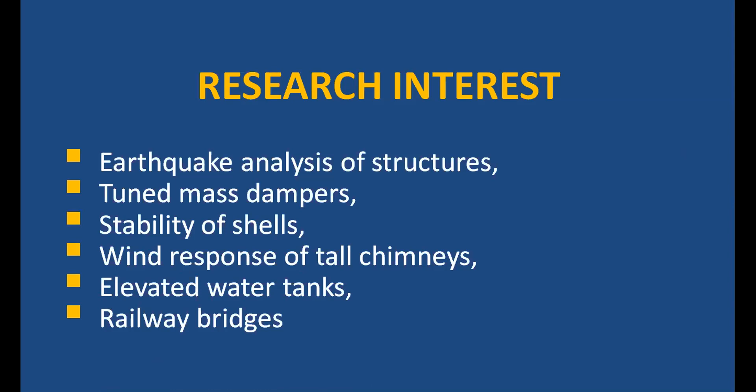He is having research interest in earthquake analysis of structures, tuned mass dampers, stability of shells, wind response of tall chimneys, and elevated water tanks. He is also interested in railway bridges. He completed many research projects, on tuned mass damper buildings from 2000 to 2003 for MHRD, with funding of 6 lakh rupees, and on seismic response control of elevated water tanks from 2002 to 2005 under MHRD, with funding of rupees 10 lakh.

He worked on the guidelines for the seismic analysis of liquid storage tanks at IIT Kanpur. He also worked on the wind response control of tall RC chimneys from 2006 to 2009 under the UGC, with funding of 10 lakh rupees. He also worked on the development of explanatory examples for IS 1893 and IS 13920 at IIT Gandhinagar.

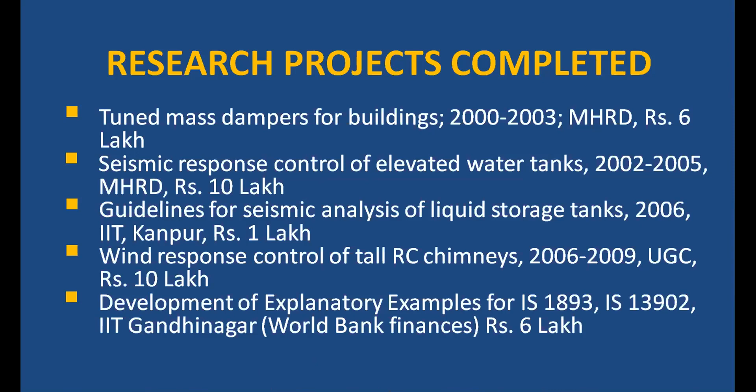Many consultancy projects were under his guidance. Some of these: he worked on the design of a telephone exchange building at Bangalore, and on vibration testing for a wall for a nuclear unit. He also worked with industries at Nagpur, and in the area of structural design checking of water tanks for the Government of Maharashtra.

In the area of publication, he published 19 papers in international journals, 8 papers in national journals, and more than 50 papers in conferences. He supervised 6 PhD candidates, and 2 candidates are ongoing. In MTech projects, 60 students completed their dissertation under the guidance of Dr. Jaiswal. Out of those, 3 MTech projects received best dissertation in the year 2008.

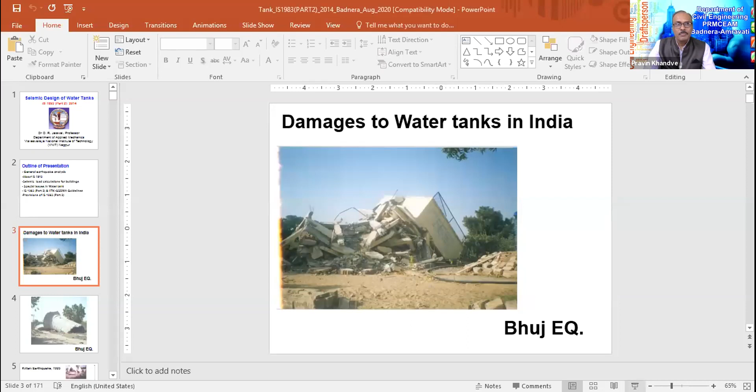Please wait a while at the speaker end because of a connectivity problem. The speaker got disconnected and is now connected again, so the session will continue. Yes, sir, you were disconnected because of an internet failure. You are connected again now, please start. Okay, how much time was I disconnected? Just for a minute. Okay, so I was showing these slides. Again, you have to share the slide. Sir, please share the slide again. Yes, now it is visible.

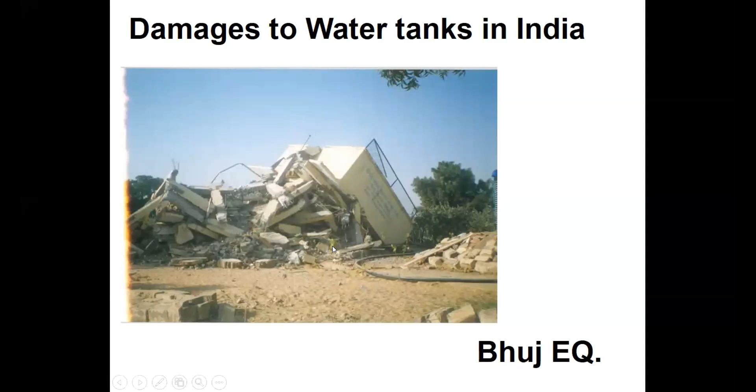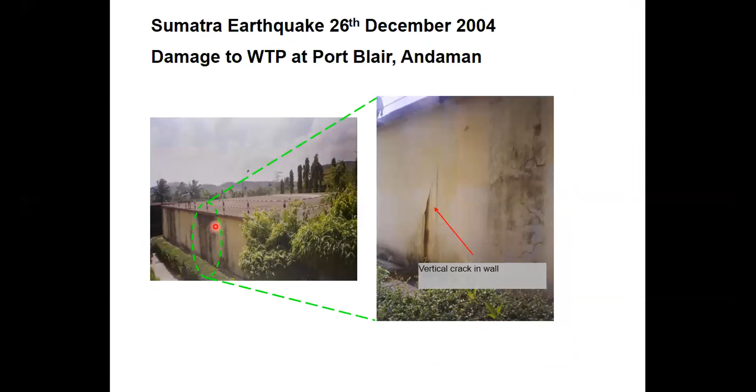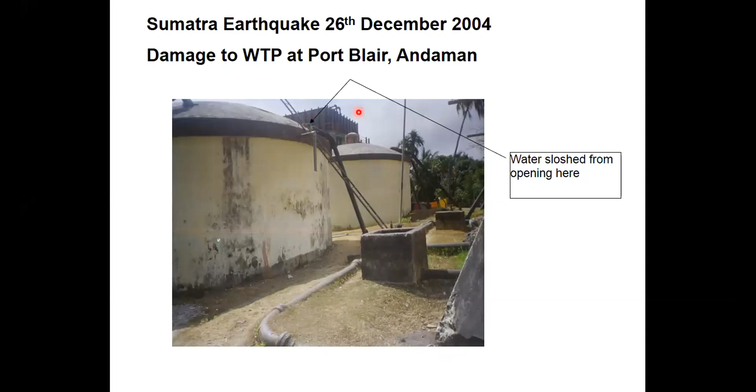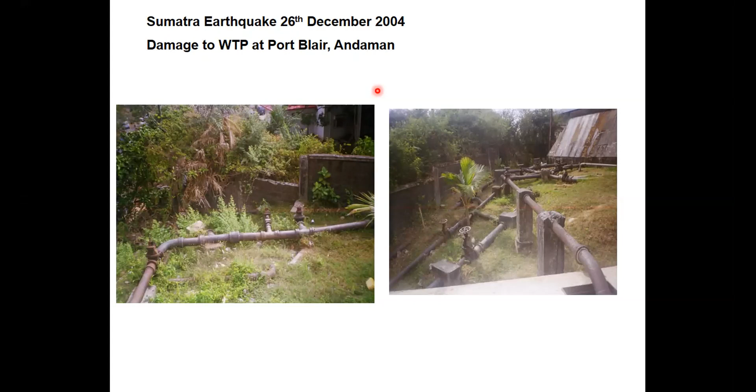So what shall we do? What should a structural engineer do so that tanks perform satisfactorily during an earthquake? Those types of issues are discussed in IS 1893 Part 2. As I said earlier, Part 1 deals with general provisions and buildings, and Part 2 deals with water tanks. Now, as we must have seen yesterday, earthquakes occur because of a rupture somewhere below our feet.

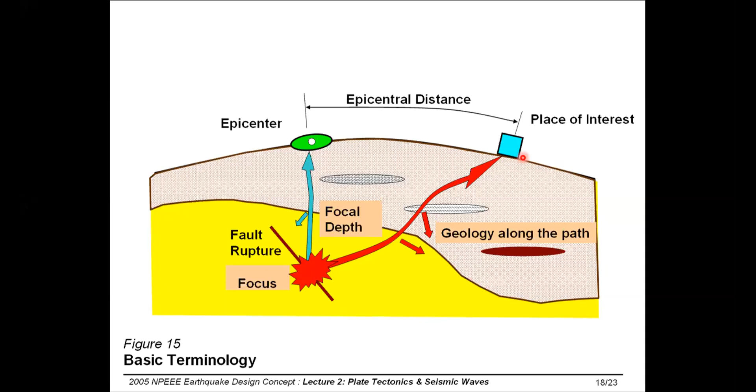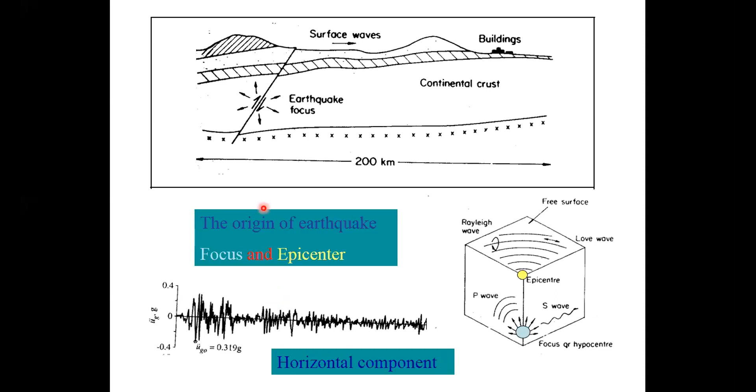Now, at a particular place, if you record the ground motion, you will see a time history like this. On the x-axis is time, on the y-axis ground acceleration, and there will be a random kind of plot. That means ground acceleration varies abruptly, randomly or stochastically during the earthquake. Typically an earthquake lasts 30 to 60 seconds, sometimes longer. Particularly, severe shaking is of the order of 30 to 50 seconds. So during this, the ground shakes randomly.

For engineering purposes, we resolve it into three components: two horizontal components of ground shaking and one vertical component. The horizontal component is more critical. The vertical component is of more concern for structures which have long spans, long span beams, long span bridges, pre-stressed structures and things like that. For ordinary, normal structures, it is the horizontal ground shaking which is more important.

So typically, this problem of calculating the earthquake load is nothing but a problem of Newton's second law of motion. It says that any structure which has mass, if subjected to acceleration, the total inertia force acting on it will be mass into acceleration. Now, during an earthquake, since the ground shakes horizontally, there is a horizontal acceleration in the structure. On any structure, be it a building, water tank, bridge or chimney, a horizontal force will act, and we have to calculate that horizontal force.

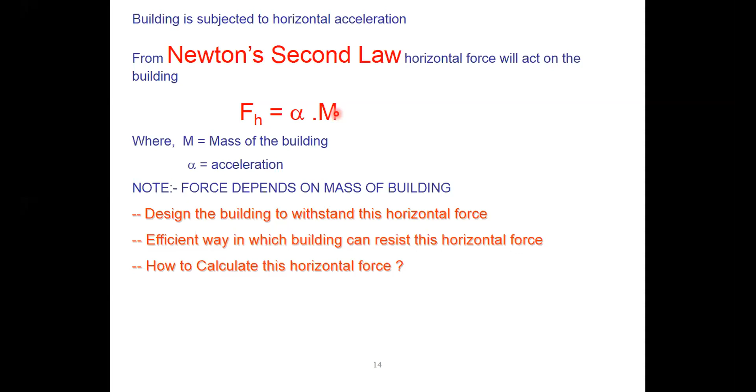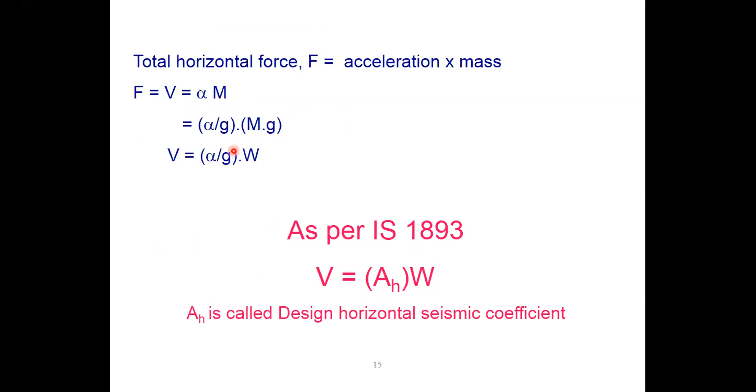That horizontal force calculation given in the code is this formula: total horizontal force is Ah into W. W is the seismic weight and Ah is the coefficient. This is the same as alpha into m, mass into acceleration. Mass multiplied by g becomes weight, and alpha divided by g is a non-dimensional parameter, which is Ah in our code.

Now this Ah in our code has three different components: Ah is Z by 2 into I by R into Sa by g. Z is the zone factor, which comes from the zone map. I is the importance factor, R is the response reduction factor, and Sa by g depends on structural characteristics. Different structures will shake differently during the same ground motion, depending on height, width, length and other parameters. Yesterday you must have been introduced to this formula.

For water tanks the same thing continues. The only thing is that you have to calculate Sa by g properly and use R properly. For buildings, R is typically 3 or 5 depending on whether the building has a special moment resisting frame or not. I for water tanks will typically be 1.5 because they are important structures, and Sa by g we will calculate from the time period.

IS 1893 has a history like this. It was first published in 1962, then revised in 66, 70, 75, 84, 2002, and now 2016. In 2002, IS 1893 was split into 5 parts. Part 1 you are done with, part 2 we are discussing now. Maybe this afternoon Dr. Ingre will take you through part 3. So like this, there are different parts.

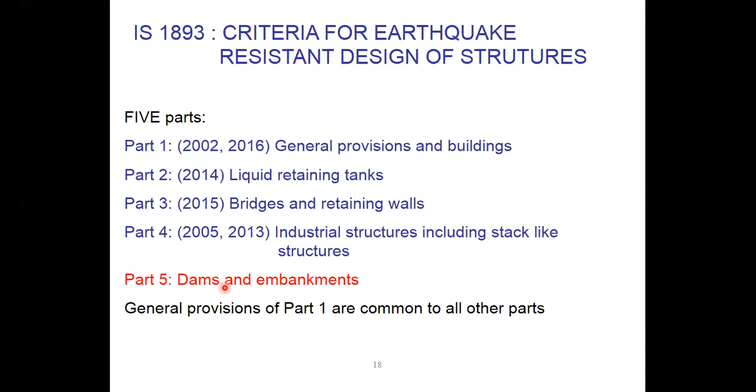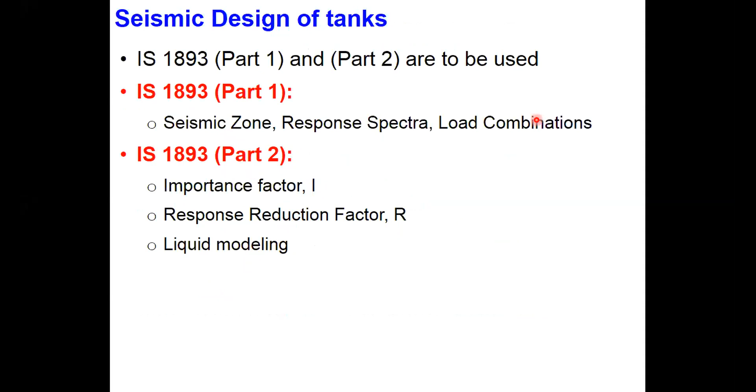Now, for buildings, you calculate Q1, Q2 by parabolic distribution of W h i square, total force. And then for buildings, there are two methods, ESA and RSA. In response spectrum analysis, you have to first perform the free vibration analysis, then calculate the coefficient, which is denoted as Ak for each mode. Then for each mode, at each floor you calculate the force, calculate the story shear at each floor, combine story shear using SRSS, and then calculate the forces on various floors. So this one single slide describes in brief the equivalent static analysis, ESA, and response spectrum analysis for buildings.

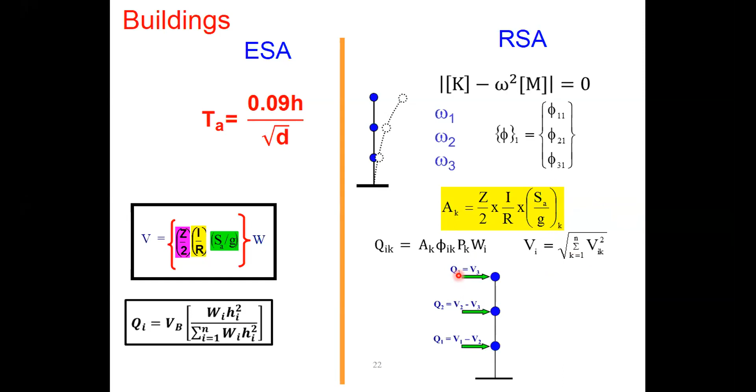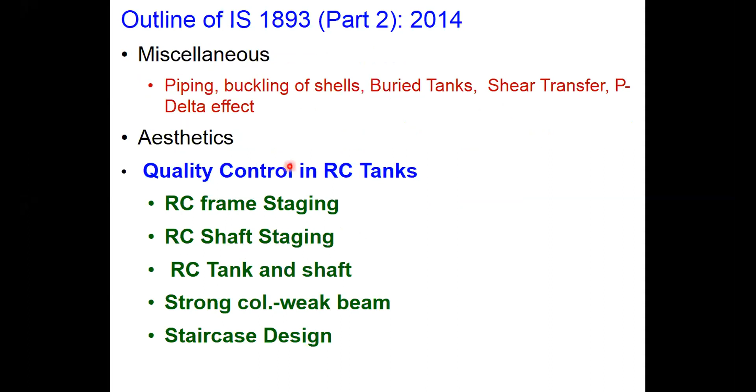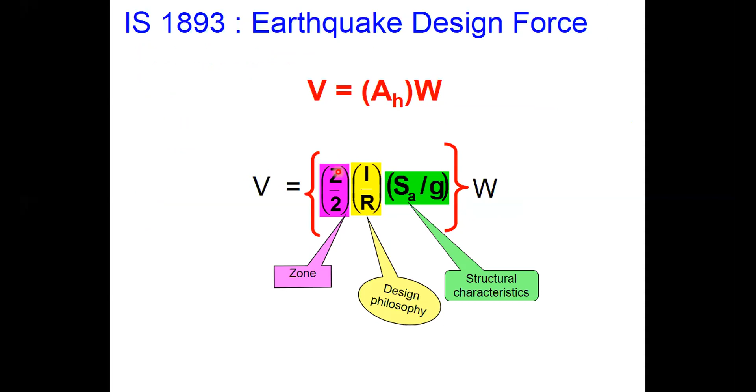Okay. So this is what we have seen. Importance factor I. In this equation, Z needs no explanation. Whatever Z is used for buildings, the same will be used for water tanks. It comes from the zone map. So depending on your location, you will have to use the appropriate zone factor. Response reduction factor R depends on ductility and other things. Before that, I is 1.5 for tanks. So for buildings, as I said, R is 5 or 3.

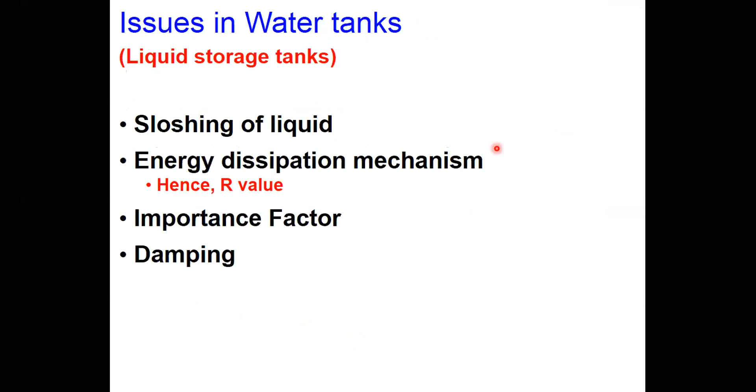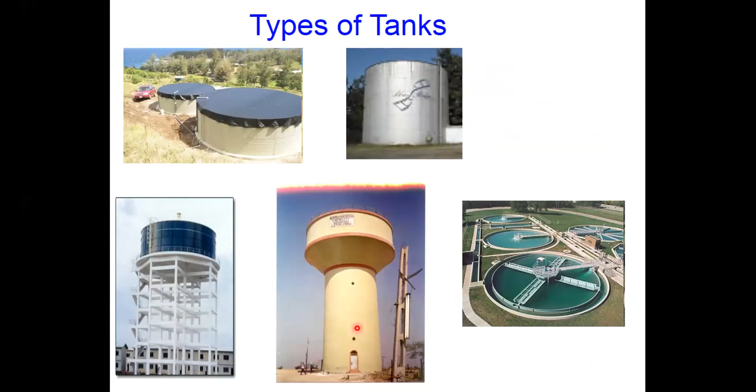You can download it. This document has provisions as well as commentary, plus about 6 to 7 solved examples. In IS codes, typically there are only provisions. There is no commentary, and of course there are no explanatory examples. But in this IITK GSDMA guideline, commentary and examples are given. Typically these types of tanks are dealt with: ground supported RCC tank, ground supported steel tank, elevated tank on frame type staging, elevated tank on shaft type staging, and underground tanks.

So ground supported tank of RCC steel type, elevated tanks will have frame type staging, shaft type staging, and then underground tank. Now one important issue as far as water tank is concerned, which we have to understand, is sloshing. If a tank is filled with water and the ground shakes, not only the tank but any pot you take and shake, or the table on which it is lying, water will slosh.

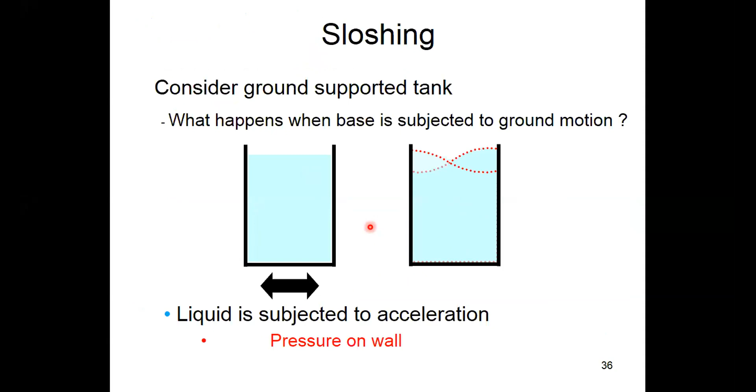If ground shakes in this direction, water will slosh in the opposite direction. So that exerts hydrodynamic pressure on the wall. Now before going for hydrodynamic, what is hydrostatic?

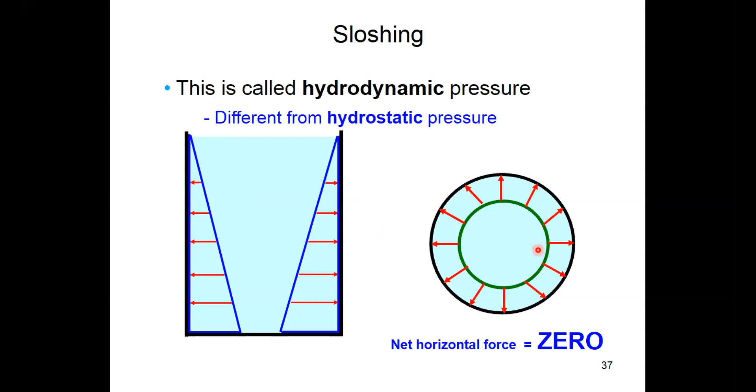If suppose a circular container is filled with water, radially in all directions hydrostatic pressure is acting, but since it is in all directions, its net summation is 0. If you sum up all the pressure in all directions, the summation is 0. But when ground shakes in one direction, the entire liquid exerts pressure in the opposite direction, and in this case the net pressure in summation won't be 0. There will be some non-zero value.

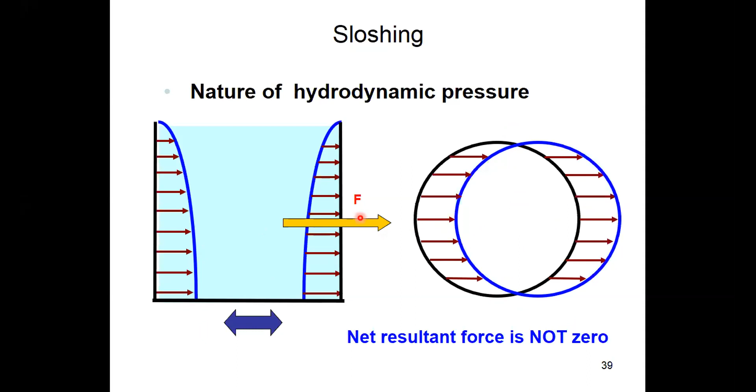So in plan, if you see, pressure will be maximum at this point and opposite to that, and pressure will be 0 perpendicular to this diameter here. So if ground shakes in this direction, liquid will have hydrodynamic pressure in the opposite direction, and its distribution in plan will be like this.

So what happens? Liquid sloshes. Now the top portion of the liquid will slosh, while the bottom portion of the liquid will move along with the tank itself, along with the container. So bottom liquid is known as impulsive liquid, top liquid is known as convective liquid.

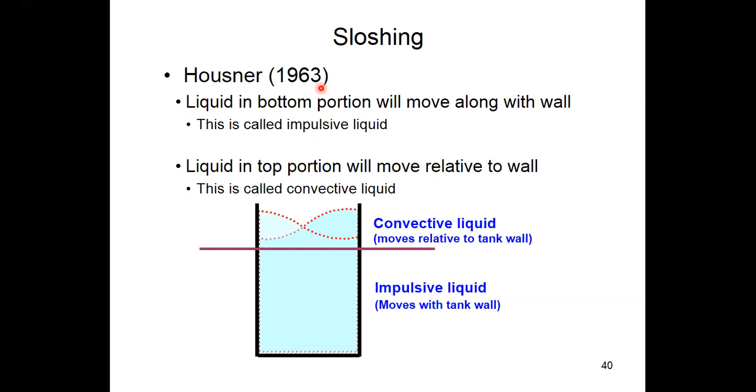This was proposed by Professor Housner way back in 1963, and this led to the spring mass model for the water tank, in which some portion of the liquid will slosh, and that is denoted by MC.

Some portion of the liquid will undergo convective motion, C is for convective motion, and the remaining portion of the liquid will be rigidly connected to the tank, vibrating along with it. So that is known as impulsive mass. So we have impulsive mass and convective mass.

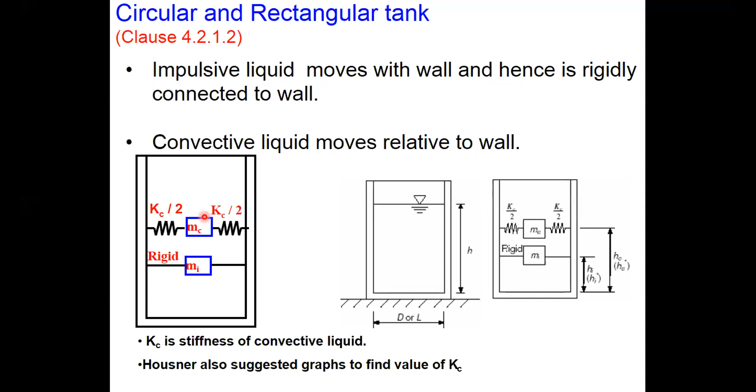Now this is what Professor Housner had given, and this diagram which I am showing on my screen is known as the spring mass model or two mass model of water tanks or liquid storage tanks. Now various formulas are given to calculate MI and MC.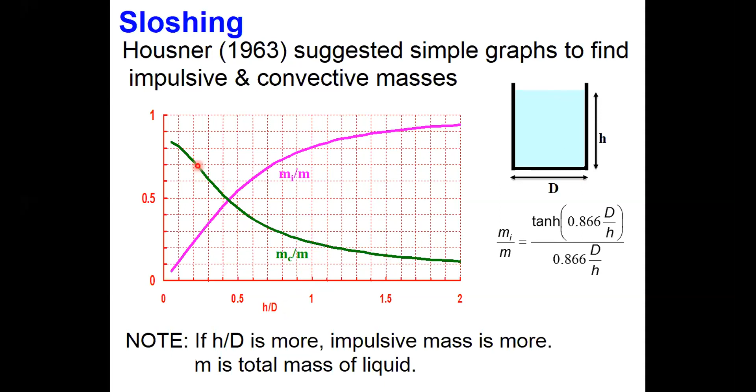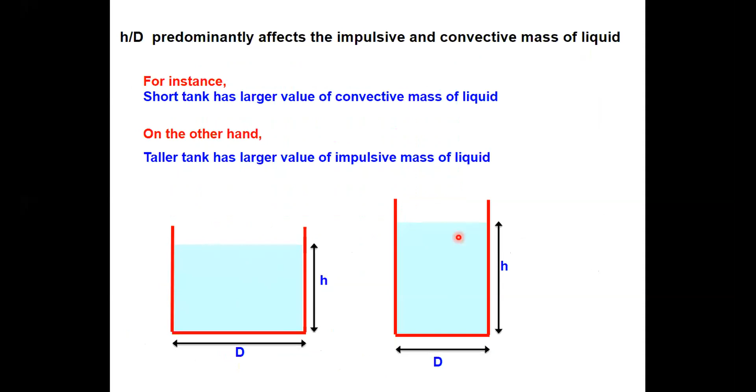So what does this graph say? If h by d is more, that means if you have a taller tank, then impulsive mass is more and convective mass is less. If you have a shallower tank, if h by d is less, then sloshing is more and impulsive liquid is less. So for a shallow tank, sloshing will be more; for a tall tank, sloshing will be less.

Similarly, a ready-made formula is available for calculating Kc, the stiffness of the convective liquid, and ready-made graphs are given, so one can use them.

Now during earthquake, when the entire liquid goes to one side, the vertical pressure on the slab also changes. There will be more pressure in the vertical direction on one side, and less pressure or even negative pressure on the other side, because more weight of the liquid has come on one side and less on the other. Now this itself leads to another overturning effect.

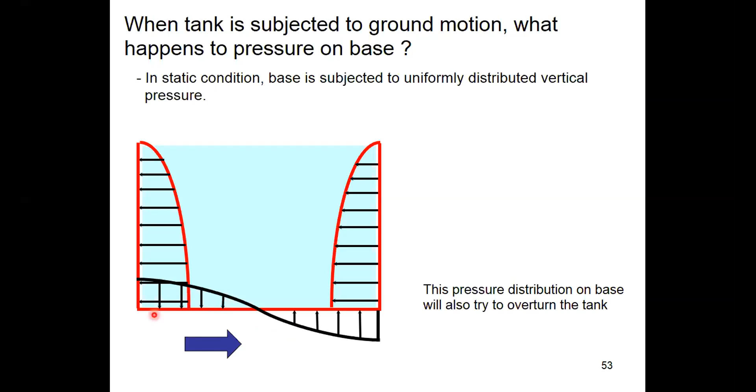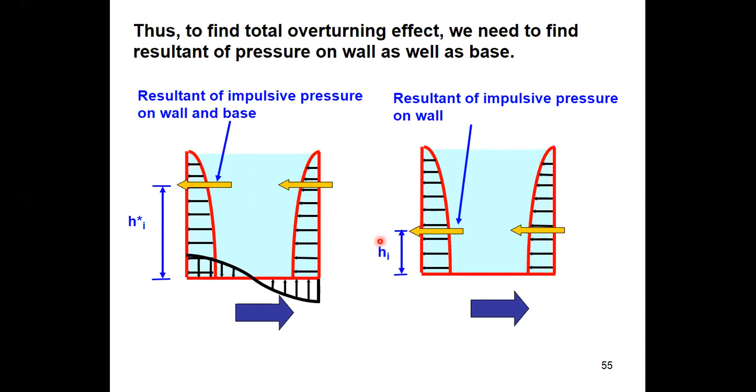More liquid pressure on this side, negative pressure on this side, and that also can be included. If that is included, the height of the impulsive force where it acts is denoted by HI star. If you neglect this base pressure, that height is denoted by HI. So the effect of unequal vertical distribution of pressure on the slab is also accounted for, and all sorts of graphs and formulas are available to calculate HI, HC star, and similar quantities.

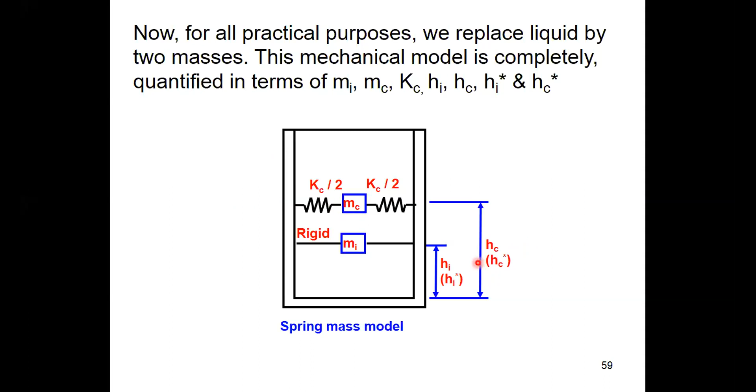So the designer can use any one of them. This is the standard spring mass model given by Professor Housner, and all the parameters MC, MI, Kc, HI star, HC star can be obtained using those graphs or using formulas. Okay, then rest of it is same.

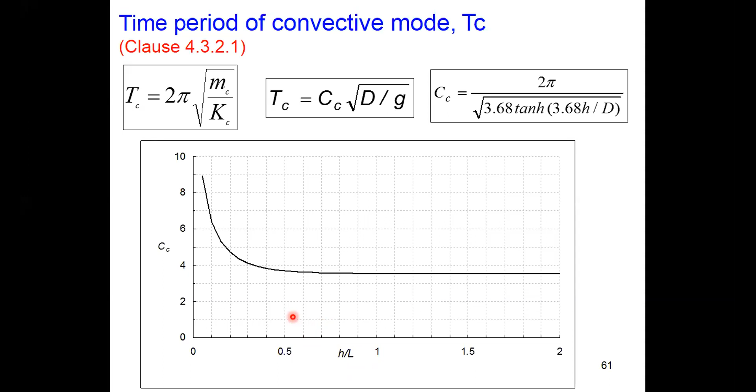Total force is mass into acceleration. So for convective liquid, we will calculate convective time period Tc. Since the formula for MC, Kc is available, it has been further simplified so that the designer has ease to use it, like Cc into under root d by g, where d is the diameter of the tank, and Cc is given in this graph as a function of h by L or h by d. H by L for rectangular tank, h by d will be for circular tank. So that can be calculated.

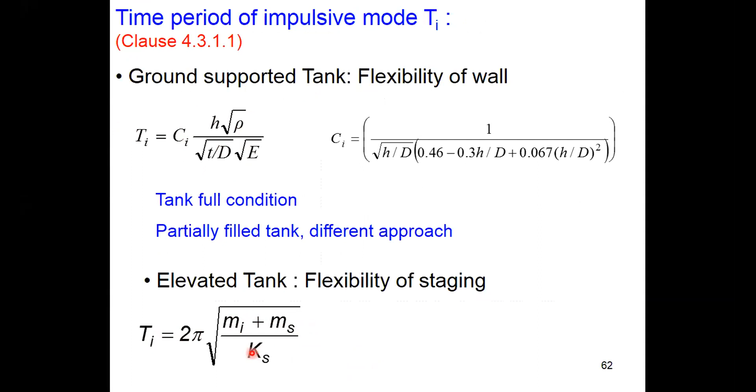Similarly, now impulsive time period can be calculated. So impulsive time period will now depend on the stiffness of the container for a ground supported tank. So for circular tank, this is the formula given for this thing. For elevated tank, standard formula T is equal to 2 pi under root m by k. So m is impulsive mass plus structural mass divided by ks. Now ks here will be stiffness of the staging for elevated tank.

Now, once you know WI, WC, that is weight of impulsive mass and convective mass, you know time period of impulsive mode TI, time period of convective mode, then depending on in which type of soil your tank is located, you get hold of SA by G for convective mode, SA by G for impulsive mode. So from TI, TC, you get SA by G corresponding to TI, SA by G corresponding to TC, and then you calculate AHI. Z by 2, I by R will remain same, SA by G for impulsive mode, SA by G for convective.

So once you calculate that, you can say this is the total force which will act on the water tank, VI corresponding to impulsive mode, VC corresponding to convective. Now, traditionally, since these two modes will have different frequencies, their frequencies will be well apart from each other. So VI square plus VC square, that is the formula to be used for combining VI and VC. This is known as SRSS, square root of sum of squares.

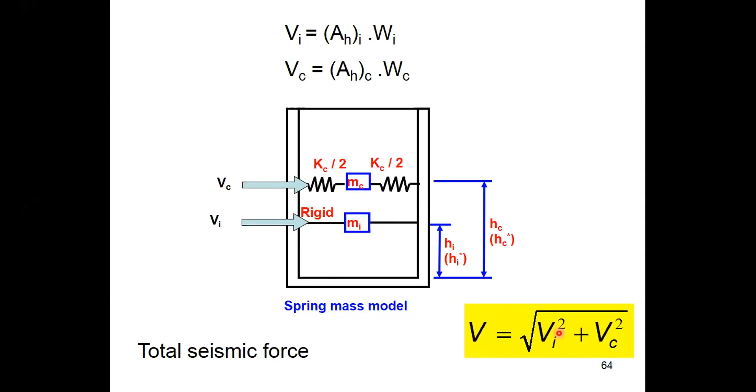So for elevated tank, the situation will be something like this. You have convective mass, you have impulsive mass of liquid, and then there is a whole sort of staging here. So this is a 2 degree of freedom model or 2 mass model. Since convective mode has a lot of flexibility, its time period is very large, of the order of 2 seconds, 3 seconds, like that, depending on H by D.

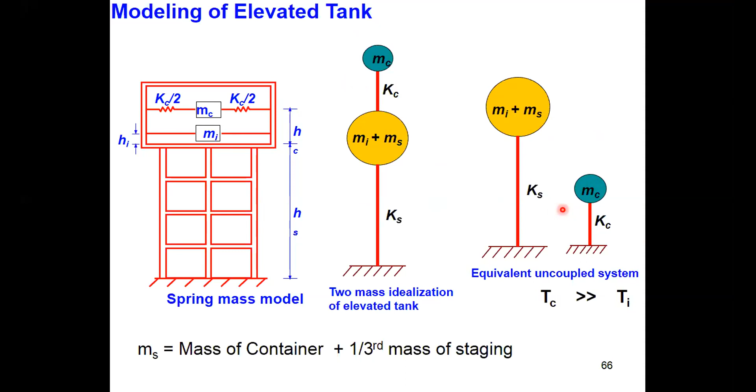Whereas impulsive time period will be of the order of 0.8 second, 1 second, 0.6 second, like that. So since those two time periods are well separated, this 2 degree of freedom system can be divided into 2 single degree of freedom systems. So that you need not solve a 2 degree of freedom problem. You can solve 2 single degree of freedom systems and get their SA by G corresponding to each one of them, and then calculate Vi, Vc and sum them.

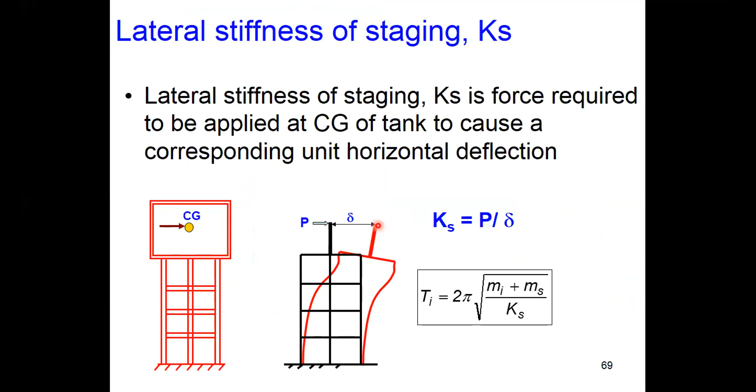Stiffness of staging can be obtained by applying a force P and observing the deflection delta of the staging at the CG of the container, and then stiffness of the staging will be the force required to produce unit deflection. So this formula is different than the formula which you must have seen yesterday for buildings. For buildings it is 0.09 H by root D. This formula is not applicable for water tank. So for water tank, you have to calculate the stiffness of the staging and then get the time period.

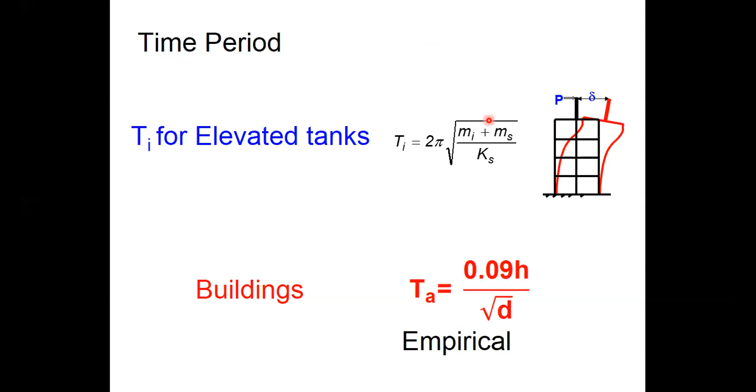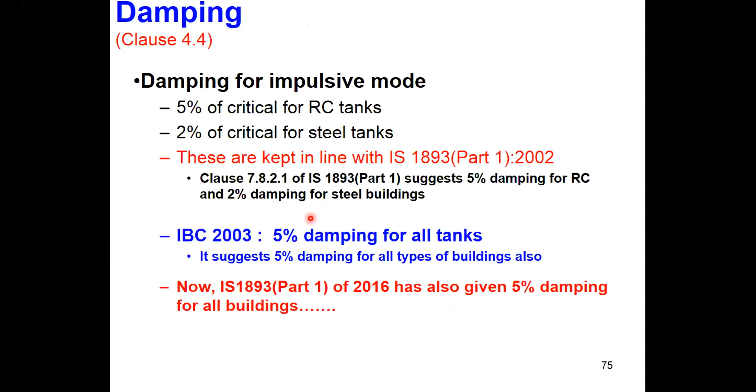Now, this is again just a repetition of that. We have seen this has to be done once for impulsive mode, once for convective mode, and then combine them. Now, damping in convective mode is very less. When water sloshes, its damping is very less, it's 0.5%. So for 0.5%, the force which you calculate for convective mode is to be multiplied by a damping factor, which is 1.75.

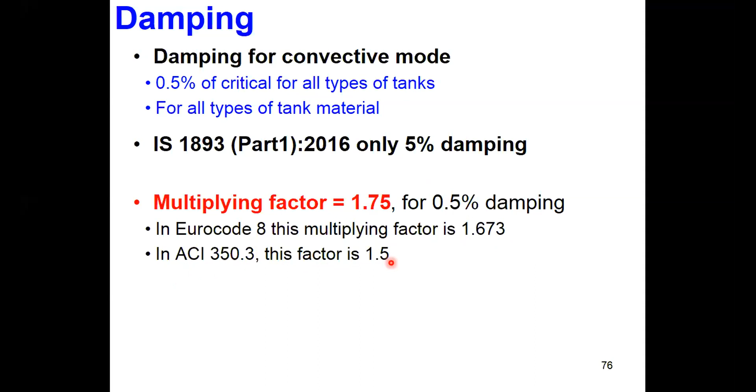In different codes, this factor is different. Like in Eurocode, it is 1.673. In ACI, American Concrete Institute code, it is 1.5. So in our code, it is 1.75. Importance factor for important tanks is 1.5. If the tank is not very important, then it will be 1. For most tanks associated with public water distribution systems, I will be 1.5.

So now we come to R. Now R, as per IS 1893 part 2, is for an elevated tank with moment resisting frame.

Special moment resisting frame, elevated water tank. This R value is 4. This for building is 5. Okay, SMRF. If water tank is resting on OMRF, ordinary moment resisting frame, no ductility, that means this will be 2.5.

Similarly, for shaft supported tanks also, if shaft is not having all the ductile detailing provisions, then 2.5. If shaft is having all the ductile detailing provisions, there are 2 curtains and things like that, stiffening at the openings, then it will be 4. So R value for water tanks is lesser than R value for the buildings.

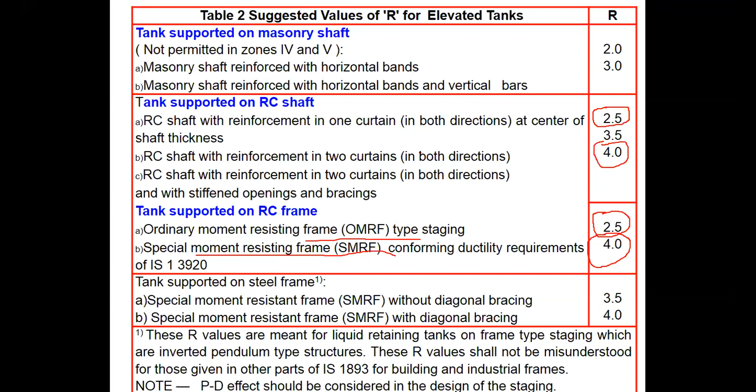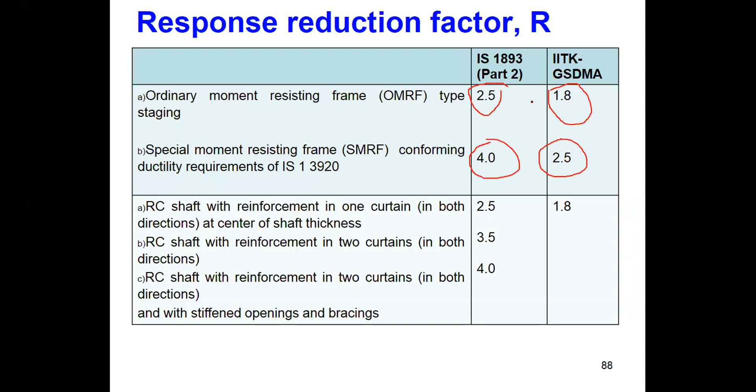But IITK GSDMA document suggests still less values. Even for SMRF, whereas IS 1893 part 2 is saying 4, IITK GSDMA was saying 2.5. For shaft, this is saying 2.5, so this is 1.8. So it is very less there, and that goes by international standards.

Since IS 1893 gives these R values, designers in India will have to use those values. Then we will have all sorts of horizontal forces - corresponding to convective, impulsive mass, corresponding to wall, corresponding to slab - and then add all the impulsive components, add all the convective components, and combine them using the method known as SRSS, square root of sum of squares.

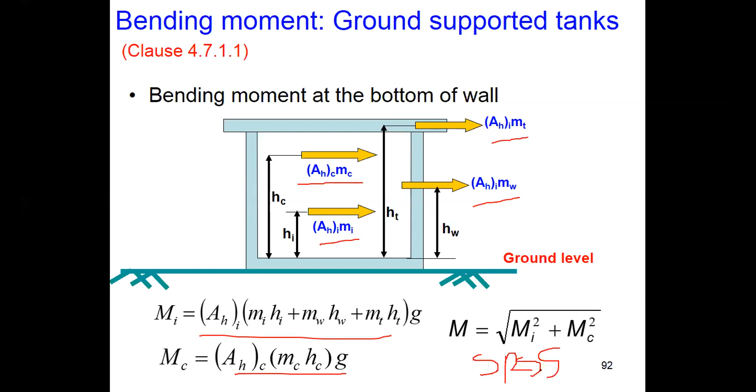Wall turning can also be calculated by using wall turning effect. So this is how total earthquake load calculation goes for IS 1893 part 2.

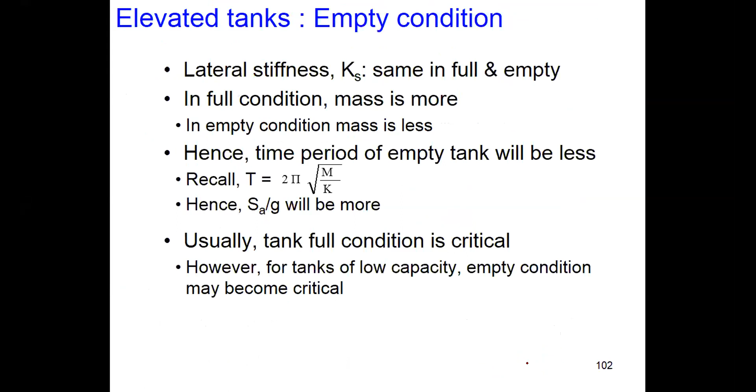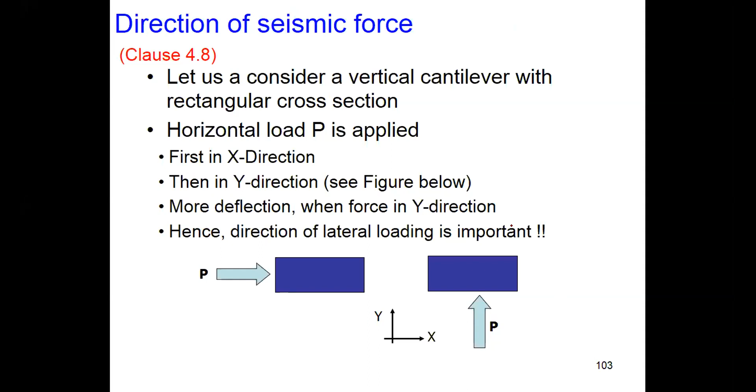Now, in building design you must have seen something like a 100-30 load combination, particularly for those buildings which have non-orthogonal frames. Now, in case of water tanks, the code says we should analyze the tank in 2 different directions.

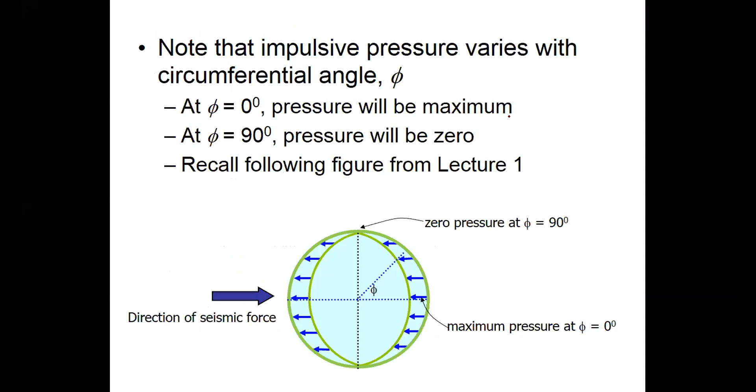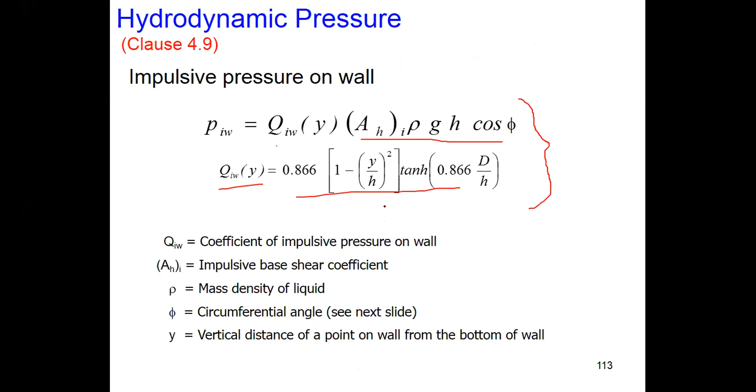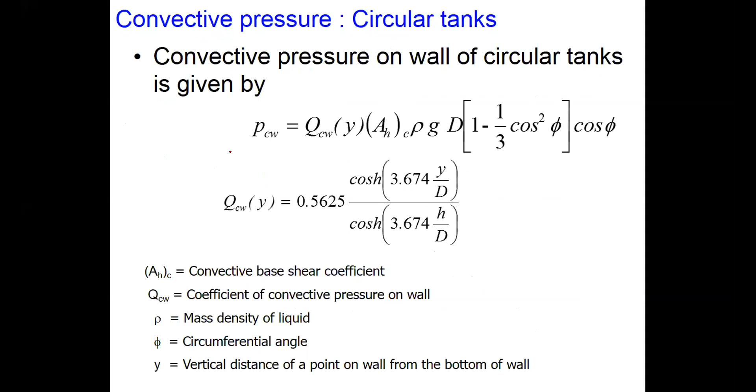Similarly, you can calculate convective pressure on the wall, PCW - PC for convective, W means wall - which is again given by some coefficient, QCW, AHC, rho, and GL. And this is QCW. Closed form expression is given, or this graph.

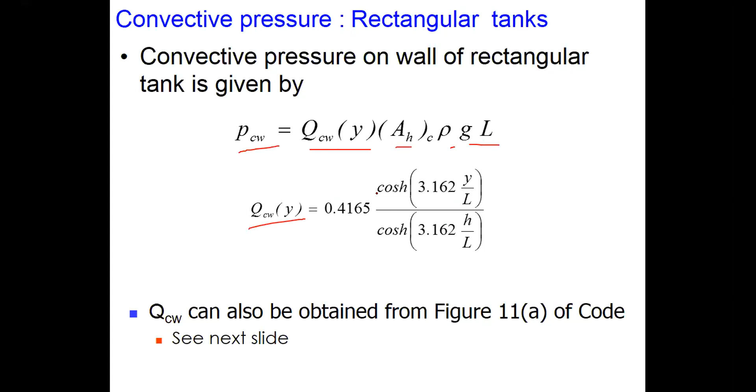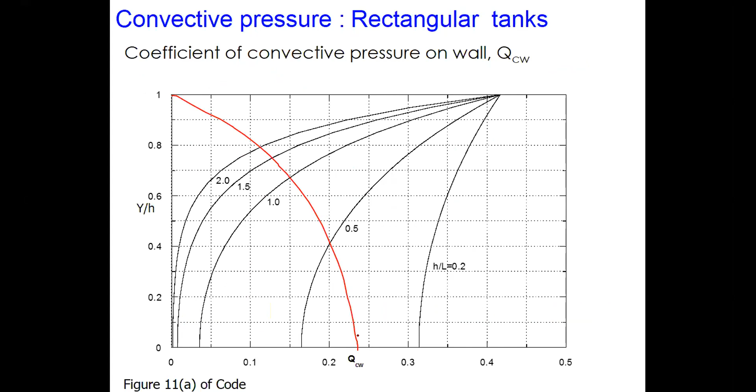So convective pressure is more on the top. The impulsive pressure variation was something like this: it was less at the top and it increases at the base. So this is the variation of pressure on the wall, and the wall has to be designed for this pressure. The force which we have calculated earlier is to be used for design base shear, or for staging design

and things like that. Since impulsive pressure is curvilinear, an equivalent trapezoidal conversion can be done. This equivalent trapezoid can be further divided into one rectangle and one triangle, and some of you must be aware of IS 3370, which gives coefficients for design of a wall subjected to rectangular, uniform pressure, or triangular variation, that is hydrostatic pressure. So those coefficients can be used to arrive at the moment coefficients for design of the wall, and things like that.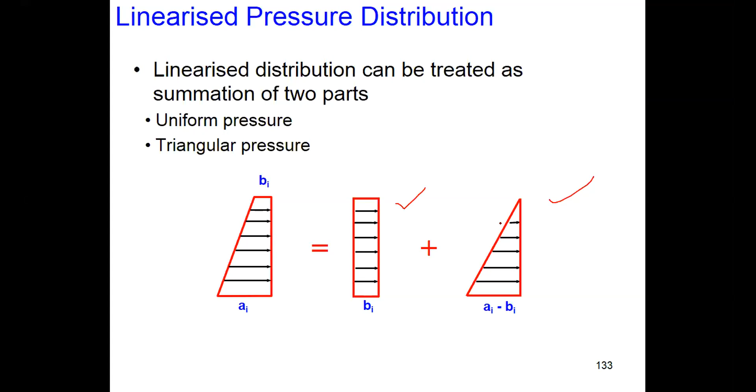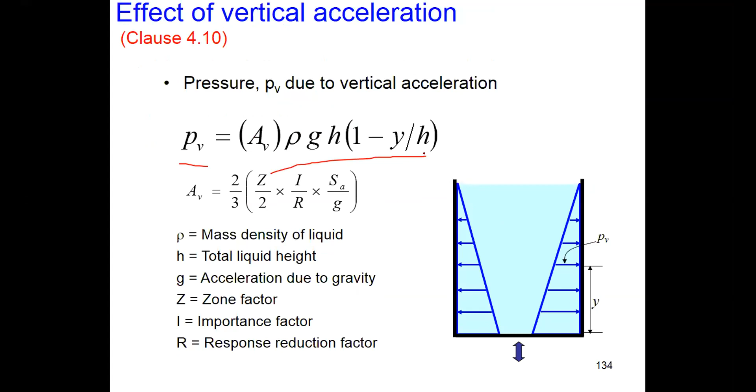So this is the pressure. Then because of the vertical component, there will be acceleration in the vertical direction, and the weight of the liquid will increase. So this PVY, the vertical pressure, can be added like this, linear. Similarly for the wall, and all this can be combined.

Okay, now we have another 5 to 10 minutes. We'll try to finish off.

You can calculate sloshing wave height, by how much the water will slosh. Sloshing wave height calculation is relevant so that water should not hit the roof slab. If there is a roof slab present, there should be sufficient gap between the maximum water level and the roof slab. From that point of view, this Dmax is important, and Dmax can be obtained using this simple formula, where D is the diameter of the tank, R is the response reduction factor, and AHC is the convective coefficient.

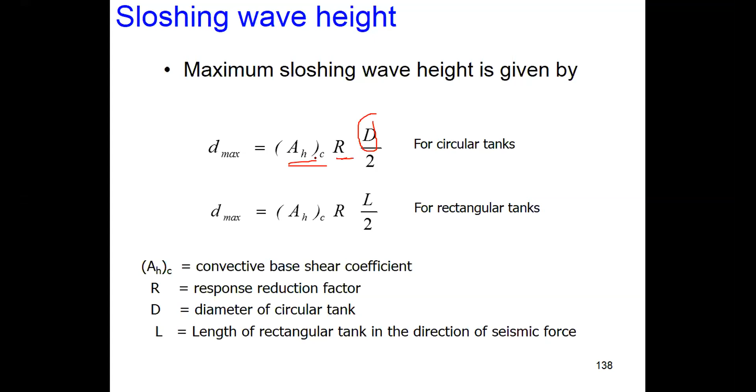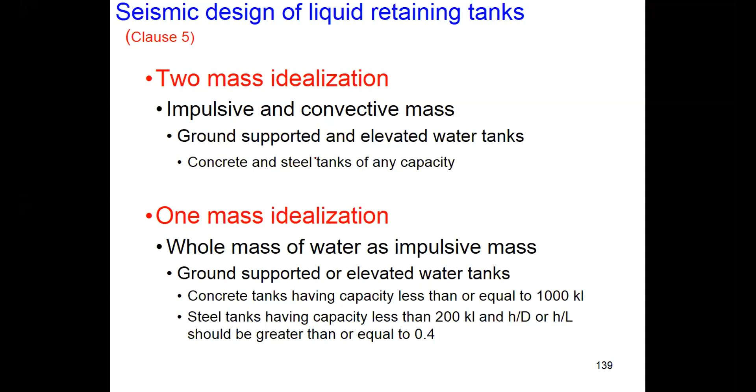Now some specific things related to IS 1893 Part 2. The two mass model is not very difficult to use, but since it was introduced in IS 1893 for the first time, it said that for some tanks you can still use the one mass model, wherein sloshing effect may not be considered and the entire liquid can be considered to be impulsive liquid. For piping, there are some cautionary notes. Particularly at locations where the pipe gets connected to the tank, damages occur, so some flexibility should be imparted there.

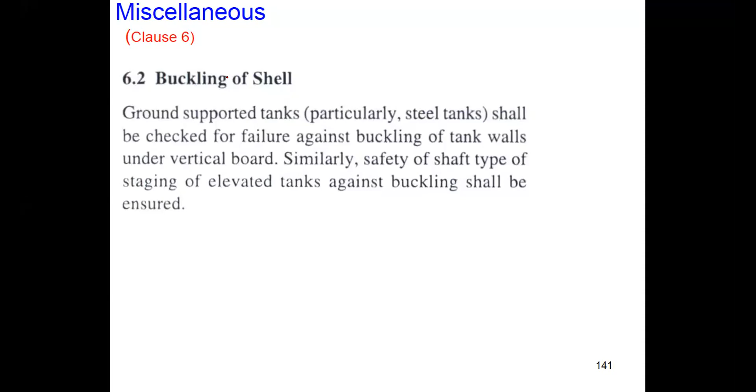Steel tanks resting on ground, particularly petroleum tanks, are susceptible to buckling. That is what is known as elephant foot buckling. So a clause is given for that also, that the designer should check that buckling. For buried tanks, some information is given.

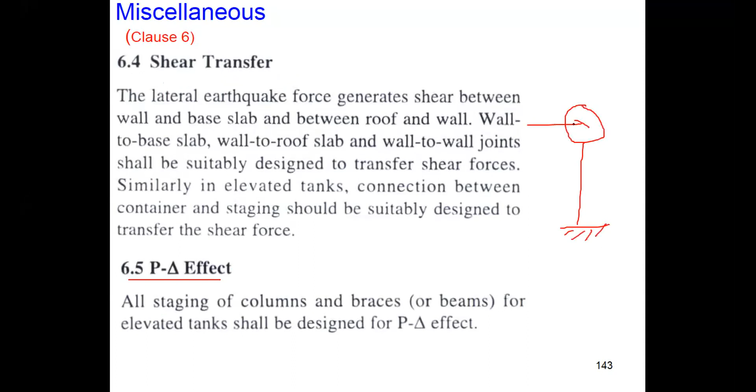P delta effect should be considered, because in water tanks a very heavy mass is at the top. It is like an inverted pendulum, so a lot of force acts at the top level, and P delta effect should be included. Shear transfer is what? From container to staging, wherever that joint is, a lot of horizontal force will get transferred from container to staging, so that portion should be properly designed.

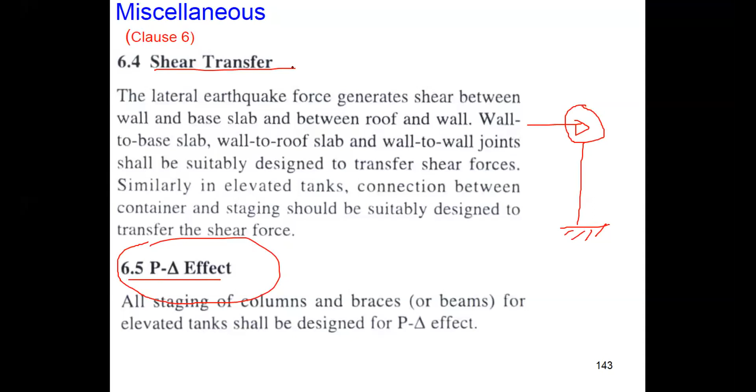Aesthetics: elevated water tanks are trademarks of various towns and cities. The code says that their aesthetic appearance should be good, and if some extra efforts are required for that purpose, they should be taken up.

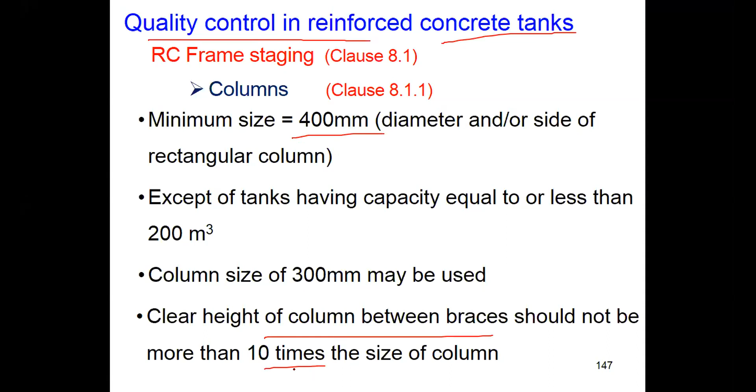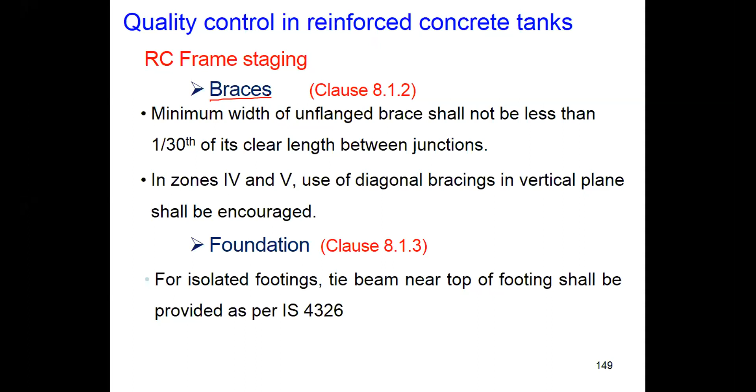Then there are other quality construction or quality control provisions, like the minimum size of the column is 400. In buildings, as you discuss in IS 13920, the minimum column size should be 300. Here it is 400. Similarly, there are clauses for braces: the clear height between two brace levels should not be more than 10 times the column size. So there are provisions for columns and for braces in elevated water tanks with frame type staging, and for shaft supported tanks also.

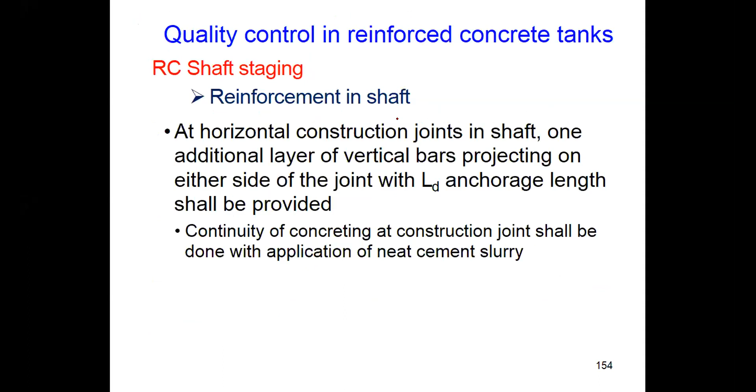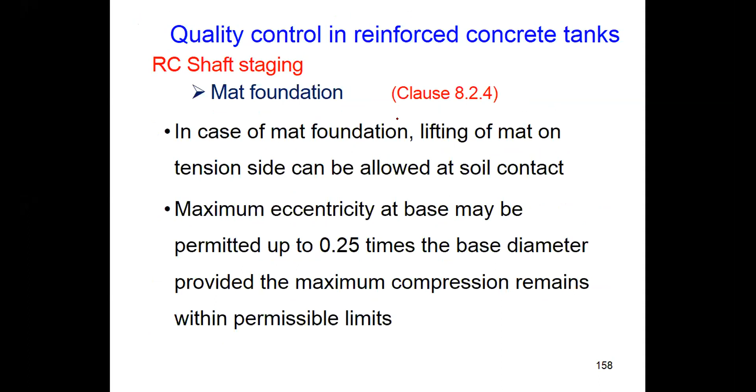There is a clause on minimum thickness for RC shafts, depending on which zone you are in and what the size is. Reinforcement of the shaft is very important; that is what imparts the ductility. So these types of other provisions for quality control construction are there, and that broadly covers everything which I have taken you through briefly.

The other ductile detailing clauses are very much intact, like strong column weak beam. The staircase should be separately done; the staircase column should be detached from the main tank body.

Okay. So that is what I wanted to discuss with you. So I will stop somewhere here. So in conclusion, I'll say that IS 1893 (2014) Part 2 is in practice, which is largely based on this IITK GSDMA document. So calculating the seismic load, two-mass model, R values are different, the critical direction, hydrodynamic pressure on wall, and sloshing are available. That is the broad coverage of this code.

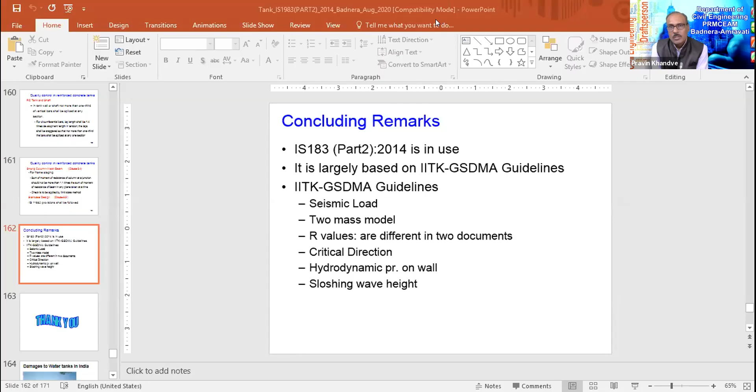Sir, is there any information given regarding the minimum dimensions of the various elements of the water tank? Yes, in IS 1893 Part 2 some clauses are given. As I said, minimum column size should be 400 mm. Similarly, there are restrictions on brace size, span of the brace, that is distance between two columns, and things like that. The miscellaneous or quality control section of IS 1893 Part 2 talks about that.